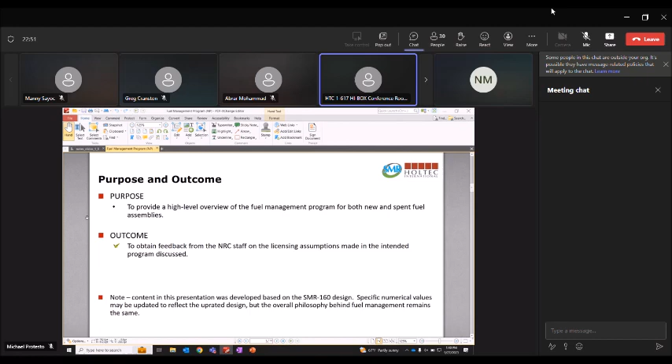All right. So plant design attributes. So SMR plant, we use the traditional PWR fuel, the 17x17 fuel assemblies that are 12-foot active fuel length nominally. Core contains about 57 fuel assemblies and a spent fuel pool with 150 cells, and that's located in the containment structure. So one of the unique design considerations is having the core, all the primary systems, as well as the spent fuel pool within the containment structure itself.

There is a dry new fuel storage rack, and that's in the radiologically controlled area of the RAB for the receipt, inspections, and storage of the new fuel before moving it into containment. And that's currently sized for 44 assemblies. Intention would be to use a multi-purpose canister, the MPC 37 and HI-TRAC combo. That's generally licensed for the storage, transport of spent fuel pool assemblies, to use that as a means of bringing in some of the new fuel into containment, and then use that as license for our spent fuel storage.

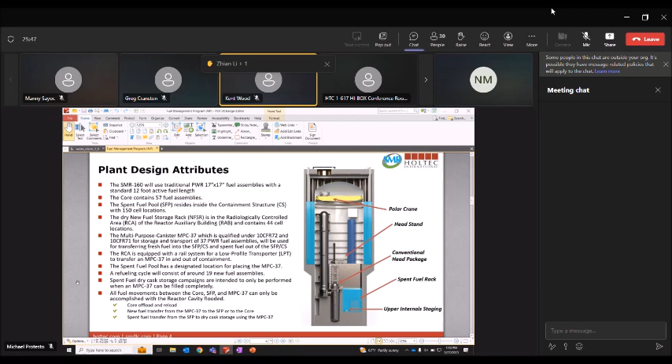We got a couple questions here, Mike. Oh, there are. Okay, sorry. Yeah, if there are questions, I can't see them, so if somebody could assist.

And this is Kent Wood, NRR, SRXP, SNFB. I got a couple questions on this slide here. So the spent fuel pool is inside containment? Correct. Okay. Is it accessible during operation at all? No, it would not be accessible during power operation. That's correct. Okay.

And could you show me exactly on this picture here where the reactor cavity is? Sure. So the reactor cavity would be this entire section here. So the reactor head would come off, and then we would flood up to pretty much the top of this floor, with this level being the refueling floor. Okay. I'm taking some notes here. Just give me a second. Sure.

What are these blue columns there on either side? The columns here, yes, that is the annular reservoir, so that will be our ultimate heat sink. So they're not involved in this at all. No. Yeah, it's outside the containment structure. Clarification. Correct. So the containment structure is kind of this straight line up through here with this dome section, and then surrounding the containment structure is an annular reservoir, and then our containment enclosure structure. And then this helps provide some of the passive heat removal for our long-term DBA analysis.

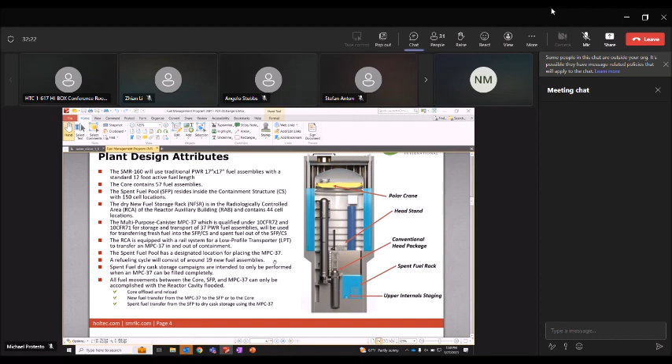Angelo, do you have a question? Yes, this is Angelo Stubbs from Plant Systems. You indicated that in the spent fuel pool, there's a designated location for placing the MPC-37. Can you show where that location would be approximately on the diagram? Is there a slide coming up that'll show that? Yeah. Okay. There is a location in the spent fuel pool designated. It's coming up, I'll wait and see. All right, I'll move on to the next slide and see no more questions.

Okay, for our new fuel handling process. New fuel will be transported into the radiologically controlled area of the reactor auxiliary building, or RAB, via the truck entrance as normally you would through a fuel handling building. And we would expect these receipts to be within no more than 2 months before the refueling outage. So on this drawing, our truck entrance would come in here. We have crane capacity in this area along the north with the new fuel storage vault on this northern wall as well. So we'd be able to up-hoist, inspect, and then store the new fuel as it's delivered.

So for refueling, the new fuel assemblies, as we said, nominally 19 for the SMR-160, will be transferred to an MPC and then transported via a low profile transporter on the guided rails into containment. So part of that rail system is shown here. And this would be the containment equipment hatch to bring the fuel inside the containment structure.

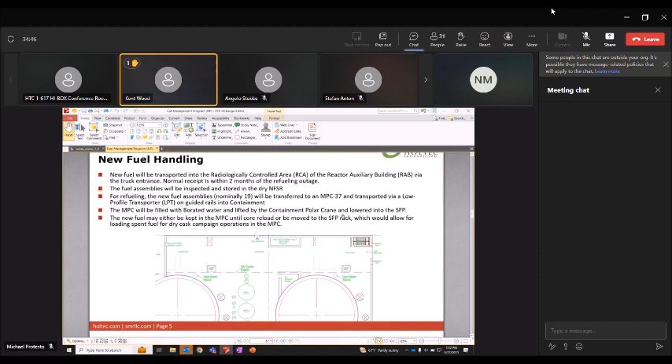There's a question. Oh, there's a question. Okay. Kent? Yeah, can you go back up to that slide? Sure. Now, this schematic of the level here, is that the refueling floor, equivalent to the refueling floor?

So this is all within the reactor auxiliary building. So the actual refueling floor, what we normally call that, will be inside containment, where the spent fuel pool and the reactor are. Same elevation, grade level 0. Correct. Yeah, same elevation. That is correct. Oh, okay. Sorry, misunderstood your question. Right, well, I probably didn't ask it correctly then.

So where will the MPC 37 and LPT be stored? Want to go to slide 9? Let's go to slide 9, Mike. Sure, that's proprietary. Is that okay? That's proprietary. Yeah, well, maybe we'll wait for a proprietary slide. We have all the detail that will show that level of detail. Okay. Yep. Okay, all right, thank you.

Go ahead, John. Yeah, thank you. Just one quick question here. Would each unit at a site have its own new fuel vault, or is that something that could be shared among different units at a site? The intention now, as long as the storage capacity is sufficient for the 2 units, it could be in one central location. Thank you.

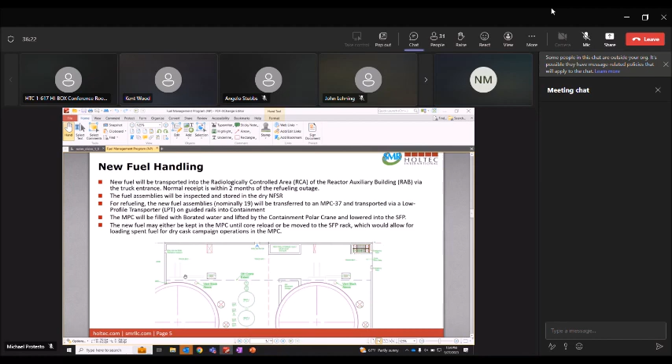Okay, seeing no further questions, I'll move on. So the main questions that we have based off our new fuel handling center around these 2 points. So are there any challenges foreseen using an MPC, which is normally licensed under Part 72 and 71 for spent fuel storage and transport, for new fuel transportation into the containment?

Go ahead, Kent. Yes, okay. Sorry, I'm clicking the wrong buttons here. You guys know about the wet canister transfer or shielded transfer canister that Indian Point did, that Holtec did the technical work for? Yes. Right. So, that was a while ago. It was 2009 when Indian Point submitted that LAR. There was a lot of work done there, and I see these as being very similar from a regulatory perspective.

There are certain regulations that would apply, GDCs, 50.68, of course, and some others. But there's no particular regulation that will cover using an MPC to move. There's no explicit regulation. So we'll probably have to do something like we did for the wet transfer canister, and that is to use the same kind of aspects and looks. And you'll probably have to answer the same type of questions that they had.

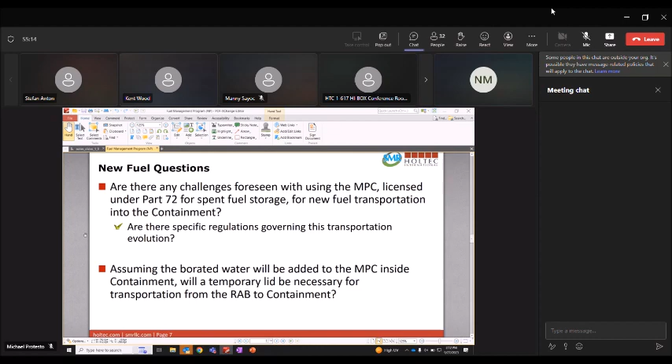All right, thank you. We'll go on to the next section, the spent fuel. So for the refueling approach overview once the canister enters containment: in the simplified sequence, new fuel will be brought in via the MPC 37 via the LPT, filled with borated water and then submerged into the spent fuel pool. From there, the whole core would be discharged to spent fuel pool racks.

For the reload, approximately 2/3 will come from used fuel from the previous cycle, with a third that we had just brought in as new fuel. Nominally after 2 cycles, depending on the heat load and the cask loading, we'd use the MPC 37 to remove the spent fuel from the pool and perform the dry cask operations as every other normal PWR.

Comparing us, there's no fuel transfer canal or separate in-containment rack. That's the benefit of the spent fuel pool in containment: you can move the fuel directly from the core to the spent fuel pool and vice versa. We'll have the conventional fuel bridge with additional attachments needed for other evolutions such as CRDM swaps. And our site will have the integrated HI-STORM UMAX dry fuel storage system and ISFSI pad on site.

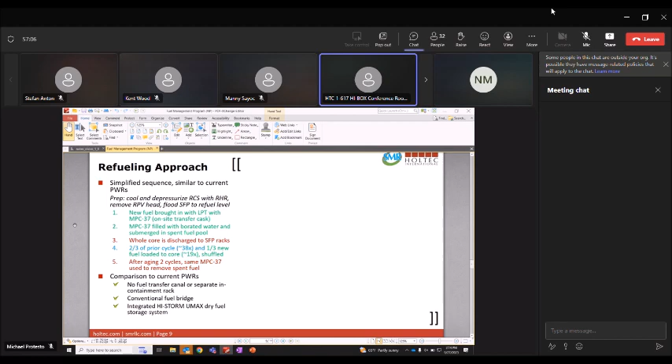For the outage evolution, it's assumed that dry cask campaigns are performed once we could fill a complete MPC. We weren't looking at partial MPC loads, which helps our spent fuel inventory if we don't have to wait for a full 37 assemblies. The case was based around the nominal 19 refueling strategy and the expected required decay time for MPC limits. Additional cells will be needed for any leaking fuel, ex-core instrumentation, filters, et cetera that build up over the life of the plant.

To optimize critical path for the dry cask storage operations during a defueled window, while space permits in the spent fuel pool, the new fuel assemblies would be transferred from the MPC to the spent fuel pool rack, and the full core is offloaded to the spent fuel pool. Moving new fuel to the spent fuel pool rack just requires those additional spaces.

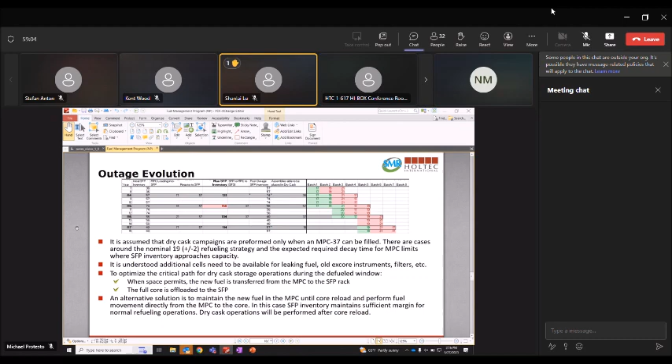An alternate solution would be to maintain the new fuel in the MPC until the core reload is performed, so the new fuel never goes to the spent fuel pool rack, using the MPC as a rack itself while it's in the spent fuel pool during a refueling outage. That lowers our spent fuel pool inventory and provides more locations. The dry cask operations would then have to be performed after the core is reloaded, since there won't be space in the MPC to load all the spent fuel. And that has outage critical path timeline impacts.

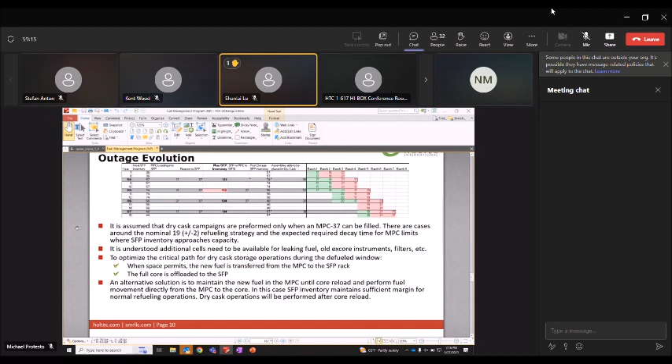That's the question. Yeah, this is Shanlai Lu from the Reactor System Branch in NRR. Just a quick question regarding your decay heat removal system. From the previous presentation, it was mentioned that for accident mitigation, this design has a passive decay heat removal system.

But during normal fuel shuffling, and when you open the cavity or flood the cavity, do you have a separate active DHR system? That's correct. So we have our spent fuel pool cooling system, the normal system whenever there's spent fuel in a spent fuel pool. That system will be in continuous operation, and our residual heat removal system, similar to cooling down the plant after shutdown to remove the decay heat from the core.

And the spent fuel pool does have the capability to continue the decay heat removal for the core offload to the spent fuel pool rack, with RHR as a backup to that system, since it is all one cavity. Yeah, the only thing I'll add is the safety-related heat removal would allow the pool to heat up and boil while maintaining acceptable water level in the spent fuel pool. That's only if those active systems that are not safety-related were to fail.

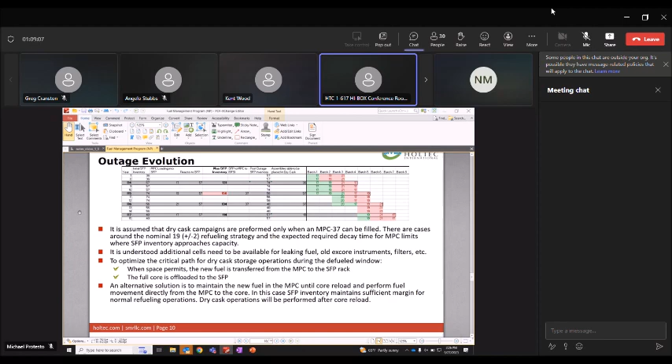Yeah, it would help to describe this, because on a refueling floor, we would only have the polar crane. We wouldn't have the refueling bridge capable of picking up the individual cells and putting them into the pool. That's right. And yeah, I'll explain that again in the next section too. I'll continue ahead. I don't see any more hands raised.

So for the spent fuel pool management, pretty typical. Once there's been sufficient time for decay, spent fuel will be transferred to the MPC in the spent fuel pool, lifted onto the LPT on the containment rails. The difference here, some other plants do this as well, it will be moved into the RAB to continue the dry cask operations instead of performing it right outside

as soon as it's landed. So we'll have systems in place to continue the cooling and perform the dry out dehydration within the RAB. From there, it'll be transferred to the independent spent fuel storage installation pad, the UMAX. The MPC will be used to transfer the new fuel into the spent fuel pool, and then spent fuel decay. I know there was something said earlier about some of the assumptions used for the spent fuel decay rates.

So the spent fuel pool was based on 0.3% rated thermal power with an average burnup of 60 gigawatt days per MTU, which was a nominal peaking value. All of our fuel is less than this on the average burnup. And then their calculations use further assumptions, such as lower enriched fuel assemblies, for a larger conservative value. And then decay heat curves were performed using our internal SCALE program that's been used for the industry.

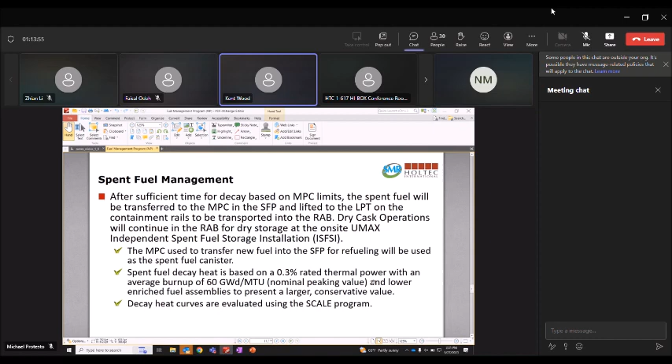We'll continue. So questions we have for the refueling section. After the MPC is lowered into the spent fuel pool, can the new fuel remain in the MPC until the core is reloaded? I think we kind of talked about this. The MPC really just becomes a wet storage rack, and as of right now it would only hold the fresh fuel. The second part: in order to minimize the critical path for the outage, can spent fuel assemblies allocated for dry cask storage be transferred to the MPC as the new fuel is transferred to the spent fuel pool rack?

So if we're bringing 19 assemblies in the MPC-37, there are a few empty locations in the MPC. Would we be able to do a one-for-one swap, where you put one of the new fuel assemblies in the spent fuel pool and then a spent fuel assembly into the MPC, knowing there would be calculations for criticality and such? That canister would then have both spent and new fuel, similar to the spent fuel pool rack that you normally put the new fuel in.